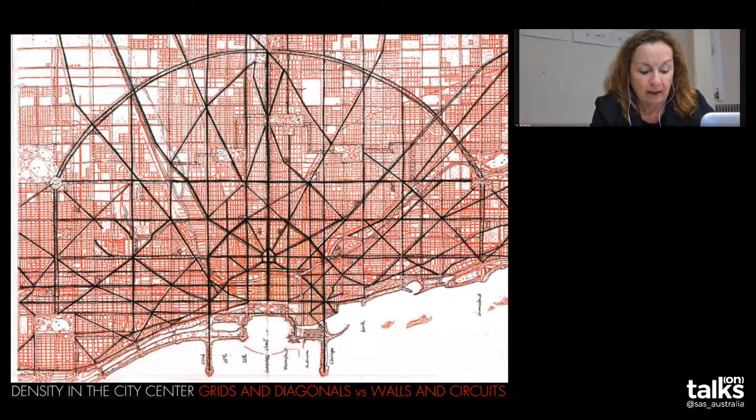So this is a way that you can use when you deal with a new master plan. These are the elements of building the space of the city.

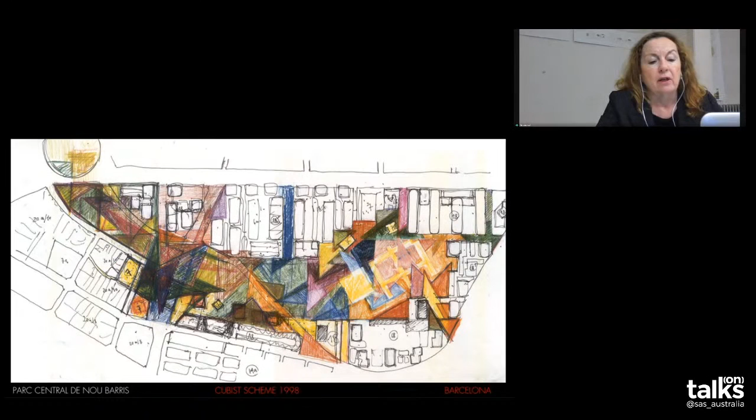You see, just by chance, I put these two elements together. It's another painting of Picasso, because it was a big space that we built in phases.

So in the first part, the triangular shape was the main element of design, but growing up, it was transformed into a more gentle landscape with curves that went toward the mountain.

You see the section, there was a 40 meter level change, and the transversal section where you see the connection between buildings and amenities.

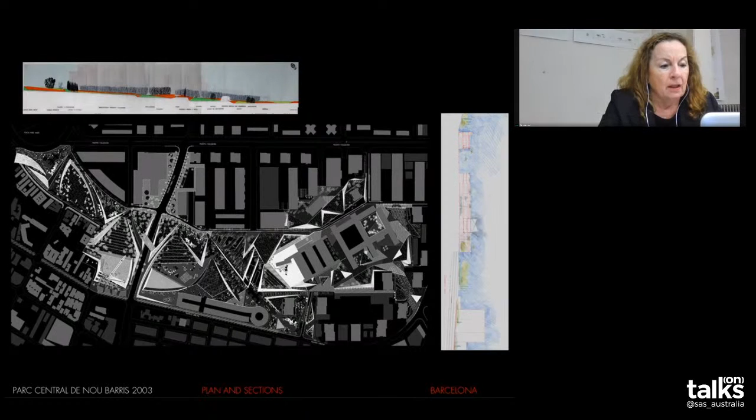This inner element, this inner building, was opened up, transformed, more than classical, transformed into a fractal element, a piece of the whole composition that was making connections from inside to outside.

So in this lower part, near the old building, the elements were triangular. You see the pavement with triangular patterns, these elements that, as at the beginning, there were no trees, we created artificial trees.

And making connections between the hills inside, transforming and adapting the historical remnants into paths.

And of course, we did this residential tower that tried to connect to the colors and materials of the neighborhood around it, which were in brick.

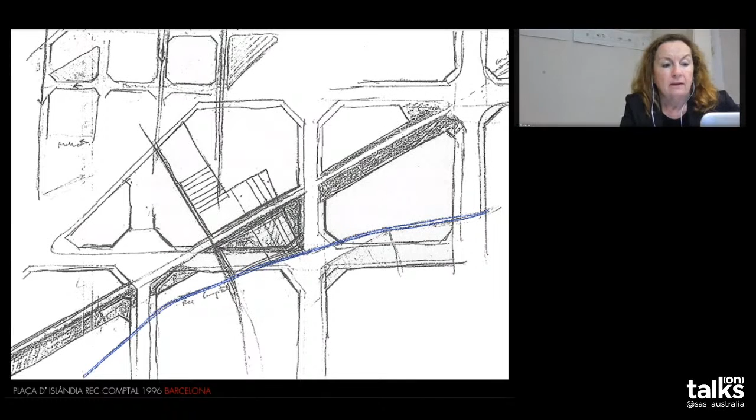In another case, you see how in the building of the grid of Barcelona, the extension on the towns around, a clash of geometries was done, and the connectivity of the old original towns was not possible anymore. So we had to decide in a new place which are the axes or streets to open or close in order to build a new space in a corner, in a marginalized, very decayed area, and how to make the whole area improve.

So we just had to reopen the streets and create in this corner a new place that could be recognized at the scale of the city. And as this was near a canal, an old canal, we refurbished the street as the riverside. Instead of the gray colors of the grid, we chose the colors of the landscape of the river.

And the last project I'm going to show, in order to explain this methodology, is more a project in the periphery of an old city called Mont Blanc. What we found there, we had to build a fire station park near an industrial zone that before was an agricultural zone. And we found these almond trees there at the first visit, so it's important how you visit the place and experience the atmosphere of the site.

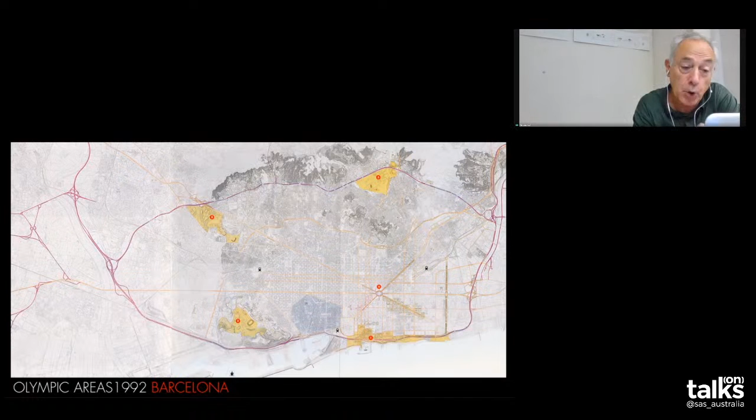So as far as 1992, this is the project for transforming Barcelona, on the occasion of the Olympic Games of 1992. It's been said that the city used the games as a way of transforming itself, not only as a sports event projecting the image of Barcelona to the world, but also to physically transform it. If you look at the different sites for the Olympic events, you recognize a strategy of scattering four areas in specific places that would regenerate systems all around the city. This is linked by a new infrastructure, the Beltway, which holds everything together while also providing a new means of mobility for the city.

So, I'll pass fast through the different sites. This is the main stadium, located in Montjuic. That was the opportunity to develop the whole hill, the final urbanization of this part of the city, while also restoring and reusing the ancient stadium built in the 30s. This is the area of Montjuic and its relation with the city, one of the hills overlooking the Barcelona plain.

The second movement was the Olympic Village. Now everyone knows about the beaches of Barcelona, but in 1992 they were unknown because they didn't exist. So the location of this village was also the opportunity to recover this seafront and integrate it as a system of public spaces in the city, as well as a new neighborhood.

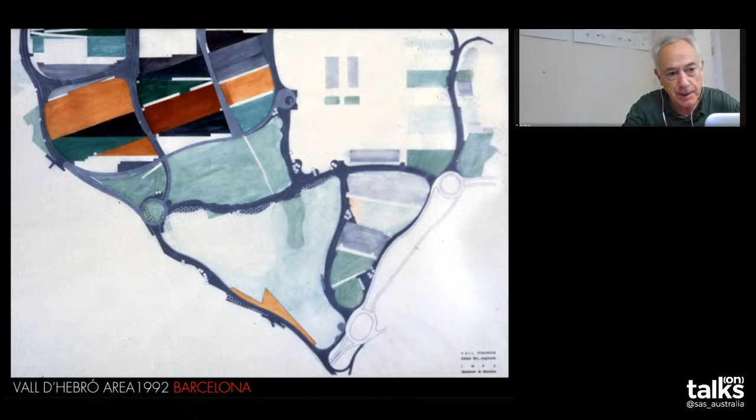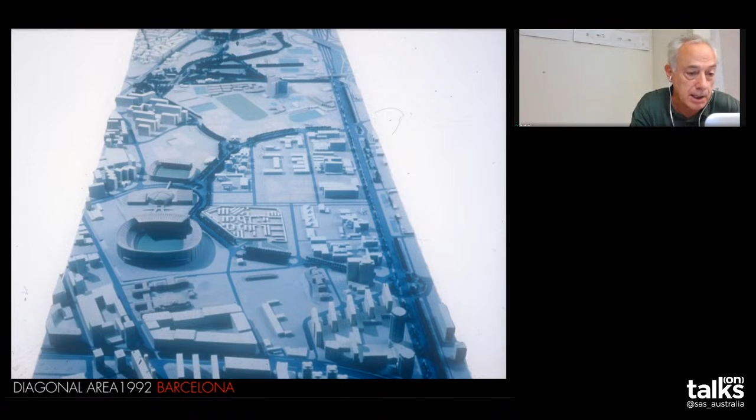Another of the Olympic areas is Vall d'Hebron, which was also the opportunity to recover an area at the foot of the hills surrounding Barcelona to the north, establishing new connections with the city. Or the Diagonal area, which gives a whole system of connections between Hospitalet, a nearby town to Barcelona, also taking advantage of existing infrastructure like the football field of Barcelona.

Now, I'm bringing all this up because we participated in the design of one of these areas, the North Glorias. North Glorias is an area halfway between the central core of the grid Eixample Barcelona and Poblenou, a more industrial area that at the time was somehow detached from the city. So this project was also the opportunity to recompose this part of the city.

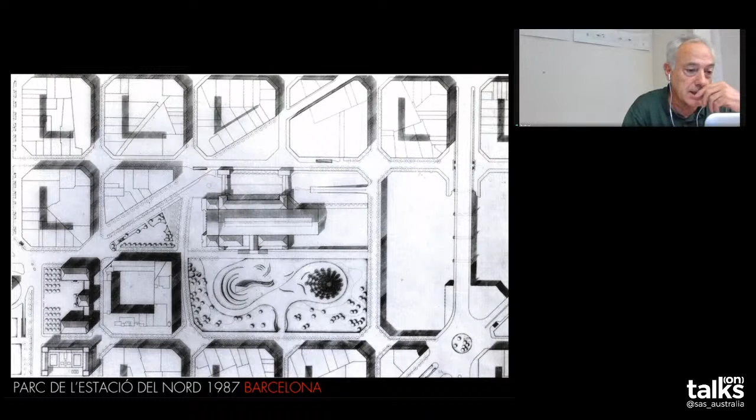Starting with the site for the sports event, which was the reuse of an ancient railway station, Estació del Nord, into a sports facility, and making a new landscape, a new system of public spaces surrounding it. We undertook the reuse of the old station building, as well as a new park on the site of the station. This was work we did in collaboration with an artist, Beverly Pepper, the American sculptor.

We developed a principle of making a new topography, which was in fact the work of art, absolutely integrated with the landscape work. All the features that sculpt the ground of the park were part of this artist's work, and Beverly was using ceramics that serve as a sort of memory of Gaudí or Miró's work, which made it very fitting for the city.

This image gives you an overview of the whole area and the different projects we did there. I don't know if you can see my pointer, but this is the old station building with a park around it. Then we also built the School of Music and a Museum of Music for Barcelona, along with new infrastructure connecting everything.

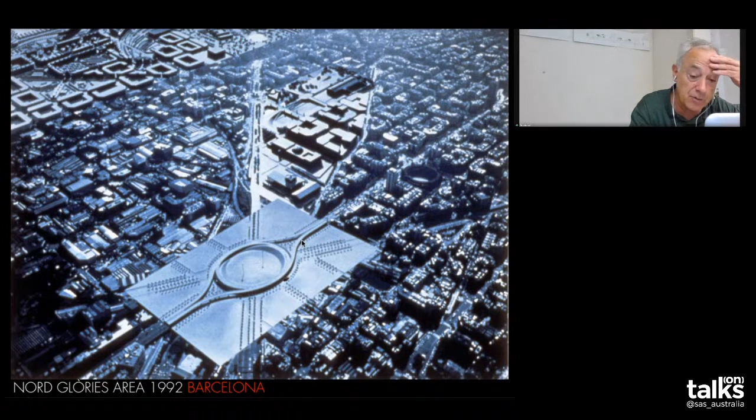This is Plaza de las Glorias, a traffic infrastructure designed as a way of articulating the system I mentioned before, between the existing historical Eixample grid of Cerdà and the Poblenou area, which besides using the same grid, had an urban fabric that was somewhat decomposed, expressing well how it was at that moment. Now it's all being redone.

This infrastructure that we were proposing operates at two levels, also developing a new square, a new public space in the middle.

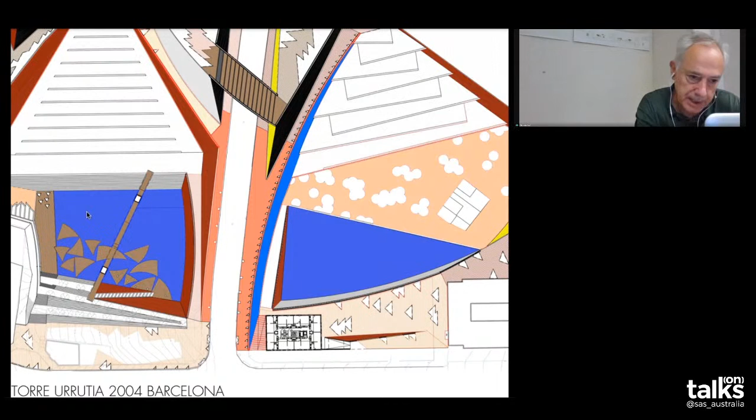Now I go back to the Parc de Nou Barris that Carmen described before, just to point out this housing tower we built there, stressing the idea that it's part of the same system of the topography of the area. We were commissioned housing of 100 apartments for youth and young people in that area.

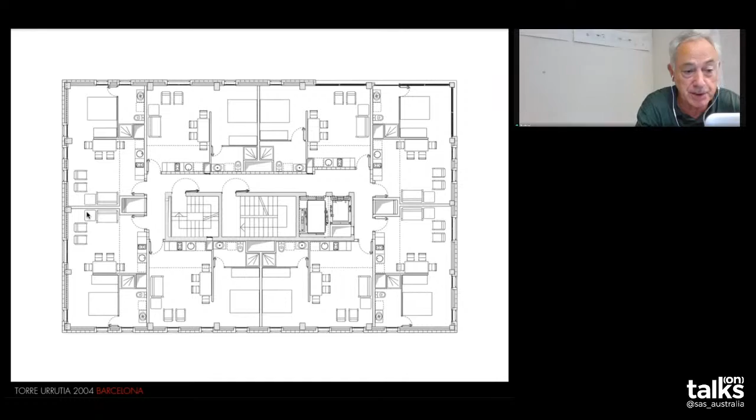We decided the typology that would affect the area the least would be a very small, concentrated plan, so a tower. We designed a tower which was concentrated, in order to allow the landscape to develop.

This relates this tower to Melbourne, because it was selected for the 2008 Sustainable Building Congress, which took place in Melbourne that year. We presented diagrams showing the shadow of the tower over the park, one of the issues we were dealing with.

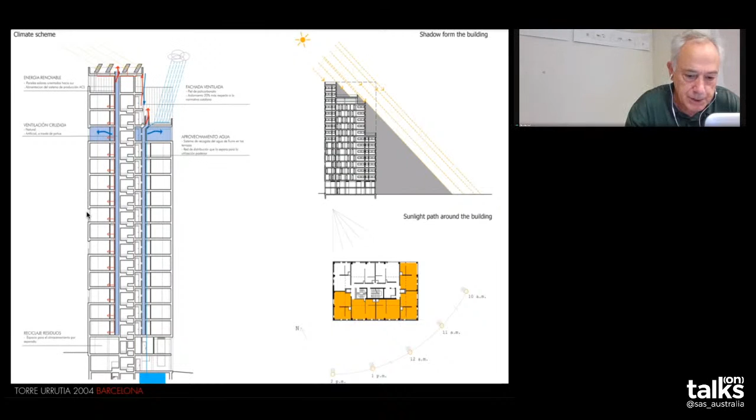The tower offers a much more closed facade to the exterior of the park, whereas towards the park it opens up, using polycarbonate paneling that tries to reflect or diffuse the sky.

From that point of view, you can say that none of these apartments are the same in terms of their relation with the exterior, because the windows keep changing — they can be elongated or vertical windows, etc.

This is a project currently under construction in Paris, in La Défense. The issue was to transform this traffic junction called La Rose de Cherbourg into a system of public space that would allow new residential and commercial buildings in the area.

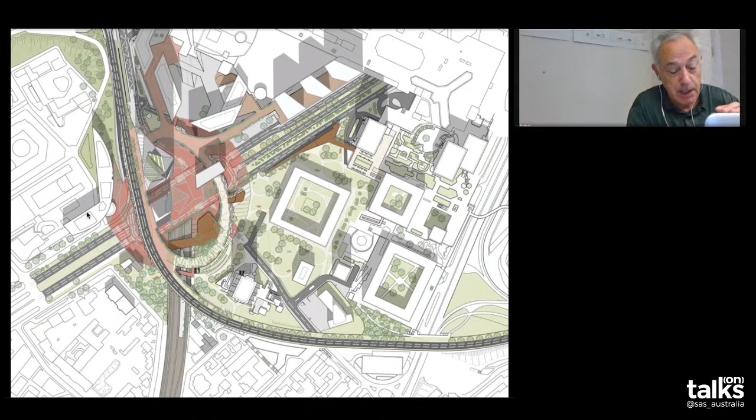This is the master plan of the area, where you see that we use the junction, the ring, as a sort of double-level public space, where at ground level there is a main square, a red square, and on the ring is a sort of belvedere over that, connected with the ground.

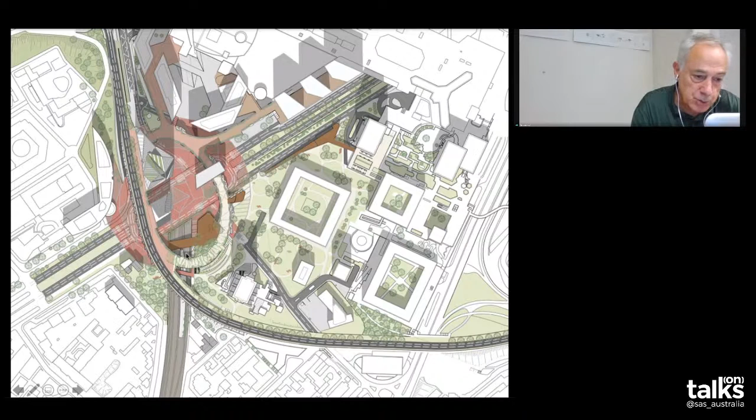You can also see the different buildings: this is a tower by Jean Nouvel, these are two smaller residential buildings connected to the area, this one is a commercial facility, and this small one there. So the whole system involved locating this new facility.

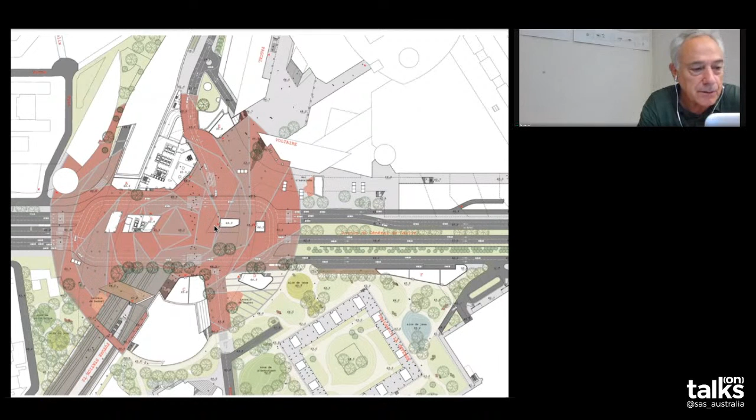This is the ground plan, where you see the square, the ground level of the square, and the ground floors of the different buildings surrounding the area. This is an overall view of how the different levels of the public space relate to one another and to the new buildings.

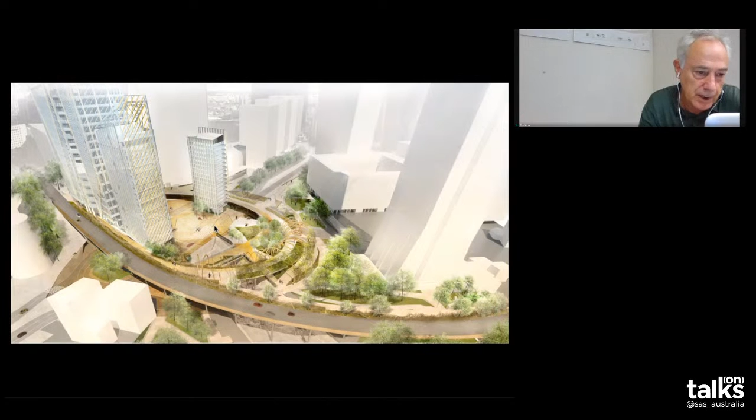We also developed a system of public spaces taking advantage of the infrastructure. The underside of this junction we used, in this case, as a playground for children, and in others we developed commercial facilities using this as a roof, always trying to bring the quality and beauty of the infrastructure, which is a very beautiful concrete work, into the project.

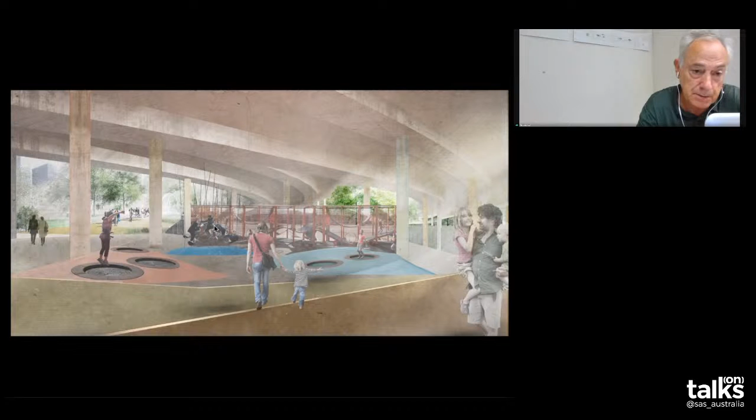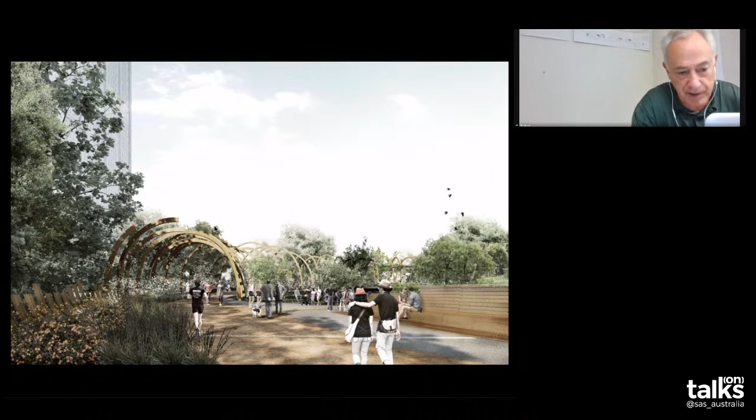In the upper level, we developed a new system of fencing and pergolas, trying to erase all the signs that come from vehicular traffic, turning it into a new landscape, a more garden-like atmosphere.

So we designed this pergola, which also tries to adjust the scale of the surrounding very tall buildings, creating an area that feels more protected. This is just a detail of the paving at ground level.

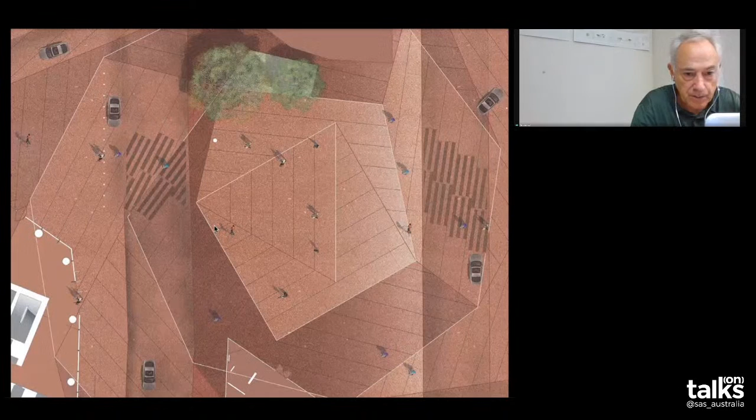This is another project, currently in a standby situation, in Vienna. It's the transformation of one of the main avenues of the northern part of Vienna, which is now used by traffic, into a more human-like public space. It's somehow similar to the Gran Via project in terms of how to deal with infrastructure within an urban context.

What we proposed was looking at the surroundings of the area, on the edge of Vienna, just across the Danube River, where there are a lot of fields that gave structure to the place. So the proposal was to insert that framework of the fields within the street, the Wagramer Strasse, which was the point of the project.

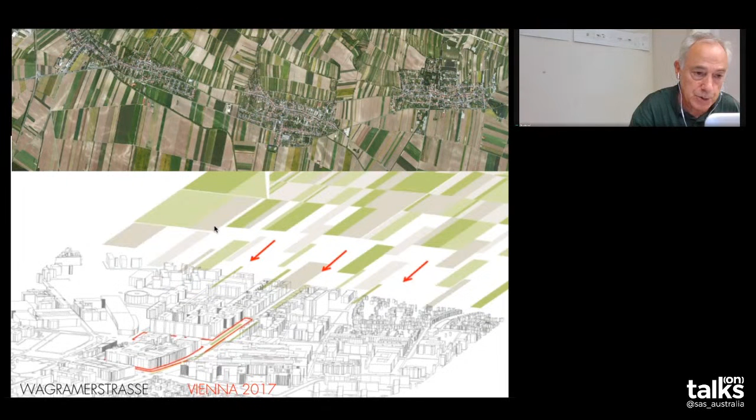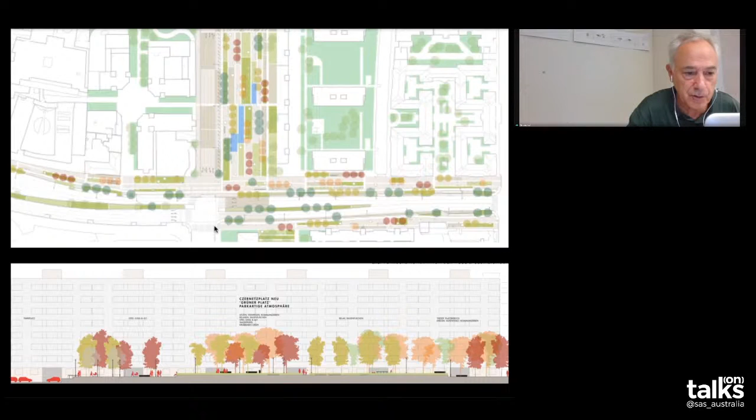These show how we landscaped that avenue into something more gentle, more human, and also related to the original landscape of the area before.

So we designed a system of roofs that developed somehow from this existing pub, the Oast House, as it's called, and those roofs extended all along the plains, giving support to new small commercial facilities to define a new area. At the end, I think what we created was a great bar with terraces in the middle of Manchester.